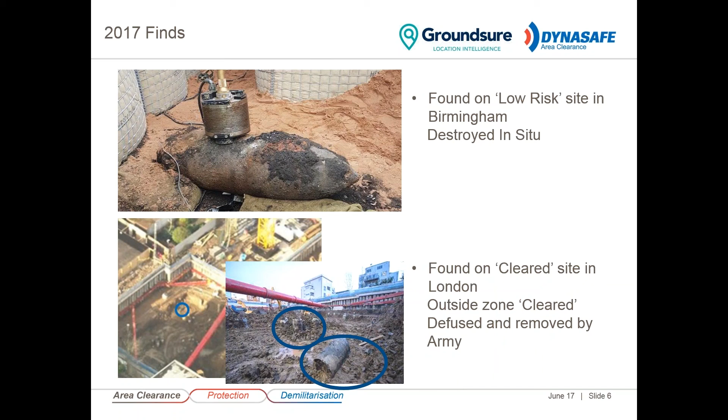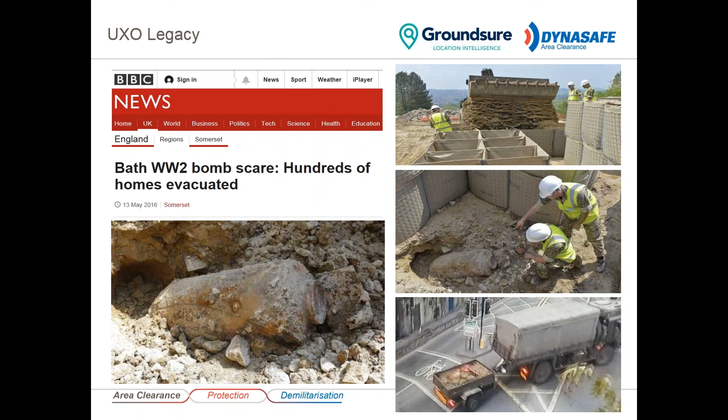So lots of items are still being found on an annual basis. We've all got responsibilities under various health and safety legislation, under various regulations and acts, and as construction professionals we also have specific duties under the CDM regs, last updated in 2015. None of these bodies of work will actually say thou shalt or you must look for a UXO. Within there, though, are very good frameworks about how to identify a risk, what risks may affect your project, and how to go about managing and mitigating them.

We're talking today about when we're out on site, not so much for the designers. At this stage, it's the principal contractor's responsibility for delivering the project safely. The principal contractor will have been issued a detailed risk assessment that the design team has undertaken, containing recommendations of how the risk should be mitigated. So the principal contractor will create a construction stage plan, ensuring everybody on site is inducted, aware of the risk, that emergency plans and procedures are in place so that if an item is found, everybody knows what to do, there's no need to panic, everybody can safely move away from the immediate work area, and everything can be escalated to the forces to come and deal with the item.

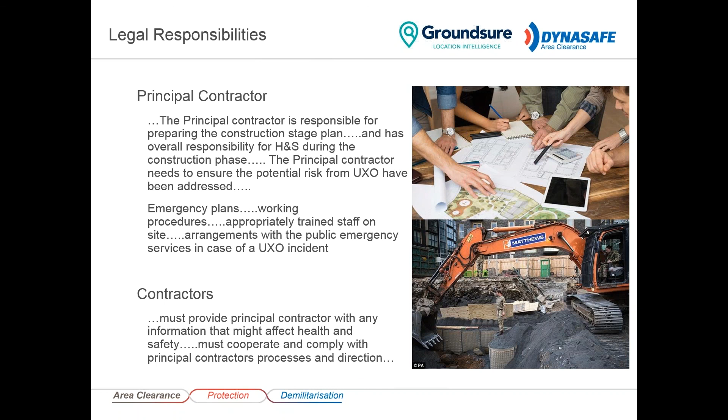I've mentioned in the legislation that there's very little - there's no specific reference to UXO. And as an industry as a whole, we've got very little relating to UXO. The approach of managing UXO is entirely voluntary.

The CIRIA guidance C681 is probably the best document that's out there. There are a number of other guides, but whereas the CIRIA guidance is over 100 pages long and covers every step of the process, some of the other guidance is just a handful of pages long and introduces only a few techniques and things to consider. The CIRIA guidance was first commissioned in 2007 and published in 2009, so about 10 years old, but it's still the best information out there. The techniques and technologies have improved slightly, but haven't had a radical overhaul, so it's still the best guidance to go to.

It's not intended to make a non-UXO specialist into a specialist, but it should allow you to understand the risks on your project, understand different approaches and techniques so you can select the right approach for your project. It was originally published because there were some less than scrupulous companies out there trying to steer people with limited knowledge down to maybe inappropriate techniques. And I'd mention that's probably just as relevant now.

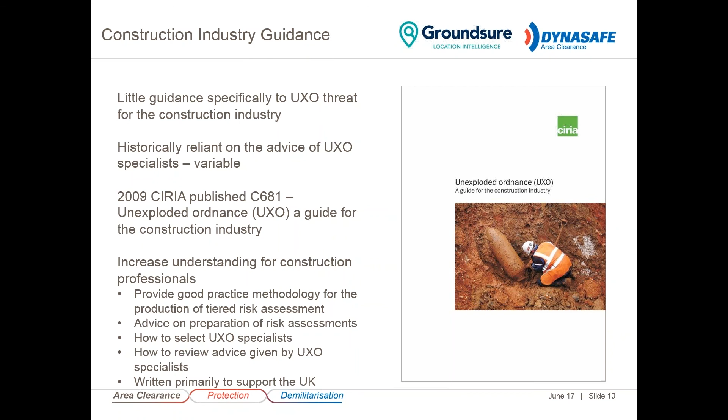As an industry, we've never been busier with the number of items being found. High-rise buildings are increasing, therefore piled foundations and general basements are going deeper than ever before. And as such, we're going into areas of ground that were never previously cleared after the war or during construction up until recently.

Preliminary and detailed risk assessments have been undertaken. They've highlighted an elevated level of risk on the project, and as such, going to the site investigation stage, or going to actual construction sites to commence work, various risks need to be considered.

Now, this slide is guilty of stating the obvious, and that is that large items tend to be deeper than small items. But it's worth noting it's not as straightforward as that. You can find large items at quite shallow depths. The bomb in Birmingham recently was found about 1 to 1.5 metres deep. The recent find in Bath was a similar level, and these were large items you would have expected to go deeper.

Obviously, the type of soil on your site will also affect how deep items can go. Dense gravels and rocks tend not to be penetrated as deeply, whereas soft cohesive soils like alluvium allow greater penetration depth.

It's also worth considering it's not just items dropped by the Luftwaffe during the war. There's our own defensive items too, things like anti-aircraft projectiles, rifle rounds, mortars, things we may have fired as a defensive measure, or placed as an area denial measure, such as a minefield or improvised mines to prevent people taking over properties we wish to protect.

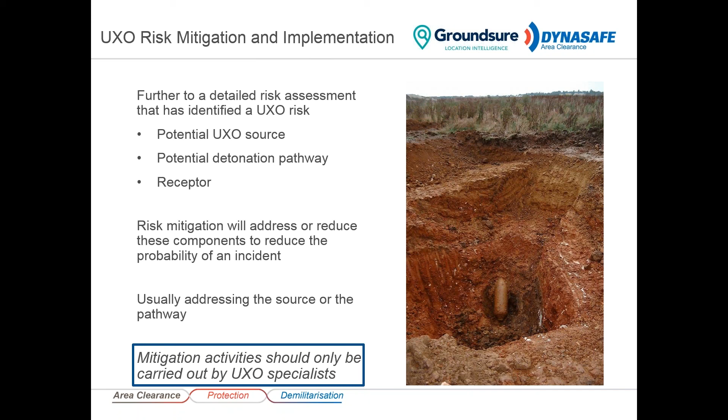It may be that a contractor has employed somebody with some kind of ground probing radar or other technique, not really designed for locating ordnance. These things happen, and to date we've been lucky that unqualified people moving or looking for ordnance hasn't caused any injuries that we're aware of. But if you are doing this kind of work, always ensure it is a recognised UXO specialist.

As I mentioned earlier, the main contractor should have emergency response planning on site, and that applies during site investigation works too, where the main contractor might not be your more traditional contractor. It might be the site investigation arm of a consultancy, a specialist site investigation consultant, or another party. Make sure the risk of UXO is clearly explained to everybody working on site, including visitors as well as people undertaking work.

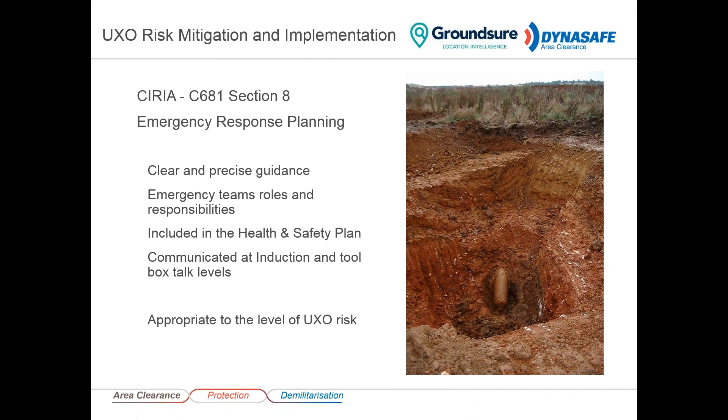Ensure there's some kind of induction process, and if at all possible, undertake a toolbox talk specific to this type of risk. If a piece of ordnance is located, make sure the supervisor knows how to safely evacuate the area, where to evacuate people to, and how to escalate the process. That may be phoning back into the office, or phoning the police immediately, dependent upon the level of risk and what's been determined in advance.

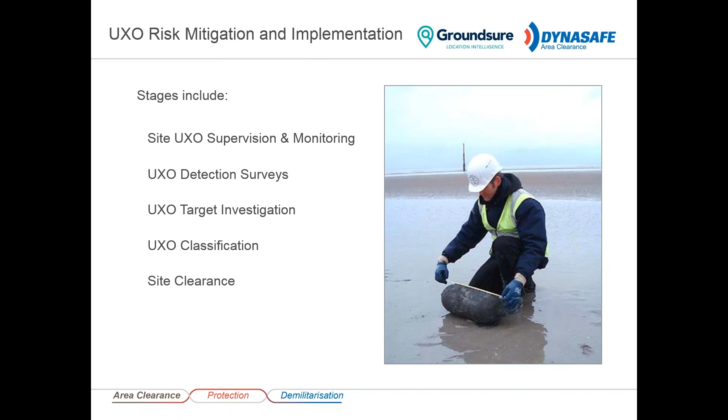Once we're on site, there are a number of techniques we can employ to manage the risk and mitigate things accordingly, and I'm going to go through those now, step by step.

The CIRIA guidance and the health and safety guidance is very much about taking a proactive approach to clearing items or potential items from site, but they also refer to ALARP, as low as reasonably practicable. On many projects, especially at the site investigation stage, mobilizing a piece of equipment to site, mobilizing a number of personnel, and spending several thousand, if not tens of thousands of pounds, may not be appropriate at that level of work being carried out.

As such, there are methodologies we can employ that are significantly cheaper, but likewise, once you're onto the main construction works and talking of spending hundreds of thousands if not millions of pounds, then employing these tens of thousands of pounds worth of mitigation measures may be absolutely what is deemed to meet ALARP.

I'm going to talk about site UXO supervision and monitoring now. This is what's more commonly known as a watching brief, or EOD engineer watching brief, where a qualified UXO specialist comes to site and helps people with the work. There will be a toolbox talk before work is undertaken, and then they will work closely with people undertaking trial pitting, shallow excavations, clearing in advance with a handheld magnetometer if possible, and identifying any ferrous magnetic anomaly within the ground.

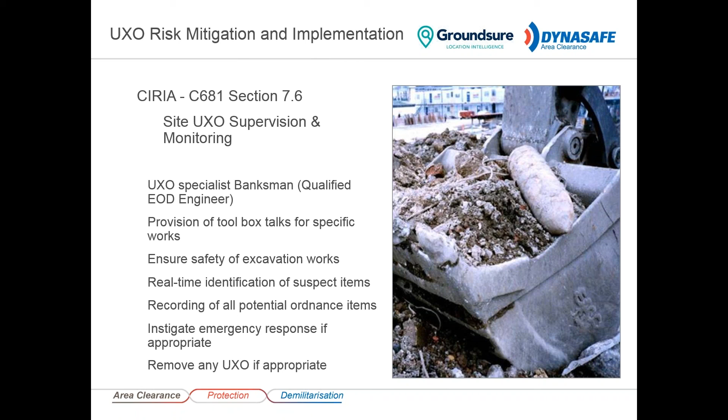Anything we find that could potentially be ordnance, we will record. It's absolutely critical that you have an audit trail of all potential or actual items so you can share that with the project health and safety team, and if the forces need to come to site, you can show them exactly what you found, where you found it, and the fact that you haven't touched it, removed it, or taken it from its original location. Also, if an item is found, the EOD specialist at this point will be able to instigate the emergency response, or advise the main contractor on the correct methodology and who to approach.

You'll notice on a number of these slides that I've referenced the clauses within CIRIA C681. After the session you can reference that document and make sure the conversations you're having with the UXO specialist meet your criteria, so you can independently validate the information they're giving you.

Here we have the UXO Detection Survey, initially a non-intrusive survey. As a company, we use the AGS system, Advanced Geophysical Software. We mobilize people to site, and they can either carry a frame with twin CV sensors on it - cesium vapor sensors, effectively a very sophisticated metal detector. These sensors can typically detect a metre wide band as you're walking across the ground.

If you've got quite a large site, we'll have to do a series of passes to provide clearance to the whole site. There's a typical survey depth - if you imagine the size of a grenade, about the size of your fist, or a mortar, probably comparable to a deodorant bottle, these have quite a small magnetic signature, and finding these items deeper than a metre is, in our opinion, very difficult and highly improbable. Things like a 50-kilo bomb, similar in size to a gas bottle you might have at home for a gas barbecue, we can detect up to about 4 meters.

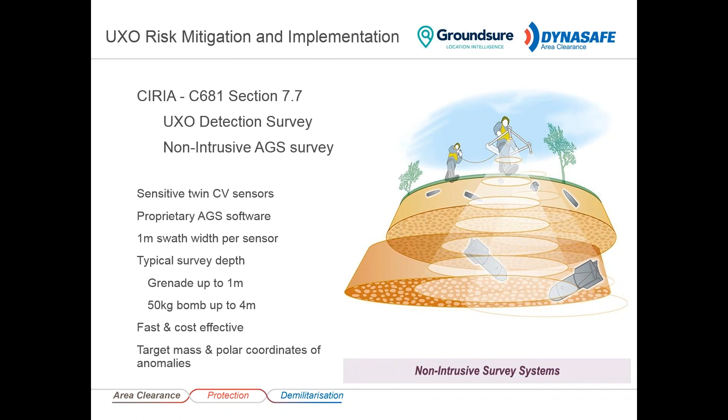The non-intrusive survey is very fast and cost-effective. With a people-mounted system, we can typically do a couple of hectares in a day. If we're towing it behind quad bikes, Argo cats, or some kind of 4x4, we can cover things like 10 hectares in a day. You should get an output from the survey giving you polar coordinates of all the anomalies you locate, and the system should also give you an indicative mass of the targets found.

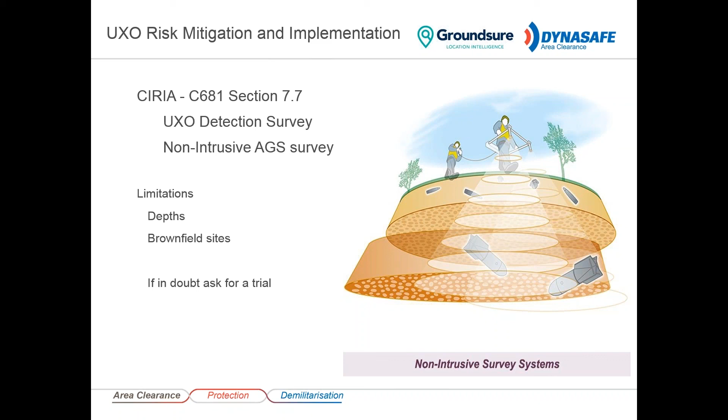As I've mentioned with the limitations, if you're not entirely certain the non-intrusive survey would be appropriate for your site, because it's quite a heavily developed brownfield site or there's a natural level of magnetic interference within the soil, ask the UXO specialist to come to site or do a trial. As a company, we routinely do trials on sites to determine whether the site is suitable - in some instances a free trial, in others a paid trial - but we'd share the output with you and discuss it to ensure the survey will perform as you intend. This is the kind of output you should be getting from a non-intrusive survey across the site.

The false colour map here: anywhere you've got a green colour, there's no magnetic interference being picked up. And then as you start to get to the blues, the pinks, the fuchsia colours, the reds, that's where we're starting to pick up something magnetic in the ground.

Now what you can see running across the top of the site is a steel fence, so there's a long linear structure there being picked up, and then also we're seeing another long linear feature marked up on this drawing as of unknown origin. At the time we didn't know what that was, but it was actually a steel reinforced footing for a wall that had been on site a number of years previously.

Then you start to see discrete blobs at the 3 o'clock position in one of the squares there. You can see several small red and purple blobs. These are actually discrete ferromagnetic anomalies, much more typical of potential ordnance or ordnance related items that you might have on site.

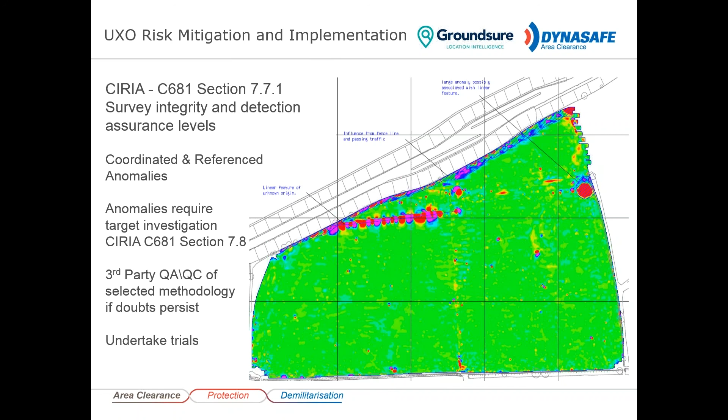From this, and in conjunction with the CIRIA guidance, we would produce a dig list. The CIRIA guidance gives recommendations on the percentage of anomalies that you might find that you need to investigate further. We're not going to recommend that you clear 100% of these items, as it's highly likely that most of them will be scrap metal - pieces of rebar, horseshoes, anything left on the site from historic uses.

People will tell you non-intrusive surveys are suitable for brownfield sites, and in our opinion, and in the opinion of the CIRIA guidance, that's not appropriate.

This was a site that we undertook a non-intrusive survey for. The contractor had told us the site was clear of any sort of metal, and he'd put a temporary access road and a piling mat in. The piling mat included pieces of crushed reinforced concrete, red brick and other metal scrap.

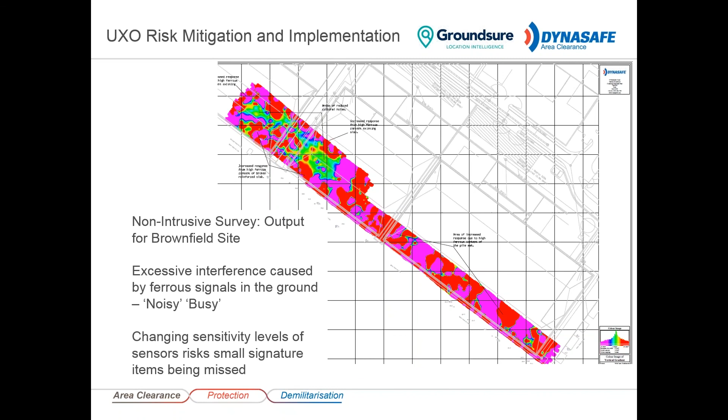People will tell you that they can play with the sensitivity of the survey. However, I personally, and as a company, we do not recommend that you change sensitivities, because if you start reducing the sensitivity, there's a chance that the small items you're looking for would be missed anyway. It's very easy for a piece of steel in the ground to mask a small item adjacent to it. So again, that's certainly not an approach we would recommend.

If you're doing piles or any kind of deep underground structure, or you want to clear a deep, long, linear structure, you can undertake intrusive surveys. With an intrusive survey, you're actually installing a magnetometer into the ground, and this can be done with a range of techniques and from a range of platforms.

The probe, as you're installing it into the ground, should have a look-ahead facility, because the last thing you want to do is push something into the ground that could potentially hit a piece of ordnance. Once you've got down to your bomb penetration depth, you can remove the probe and start to take the survey so that you can clear a column of area around the survey centre.

Again, this can be fast and cost effective. The data can be logged during the process, so you can get a very good understanding and interpret your results so that you know whether you've got a piece of ordnance in the ground.

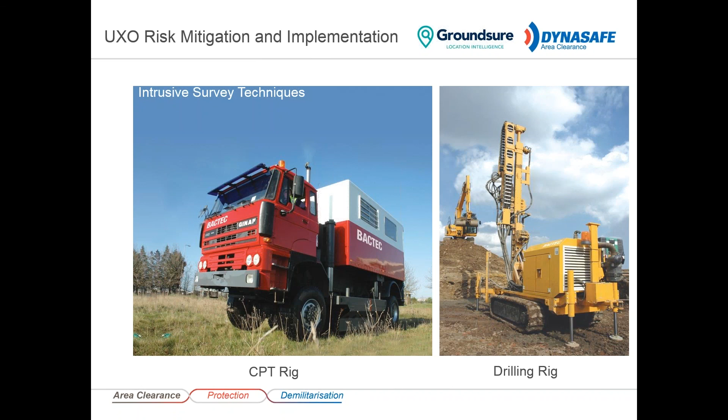We use modified CPT rigs on cohesive and soft soils, and we can use drilling rigs to get through made ground, to get through very dense granular materials. On some projects we'll use them both together, where the drilling rig goes down through the made ground to the soft cohesive soils, and then the CPT rig follows along. A range of techniques, and most ground situations can be dealt with by those two approaches.

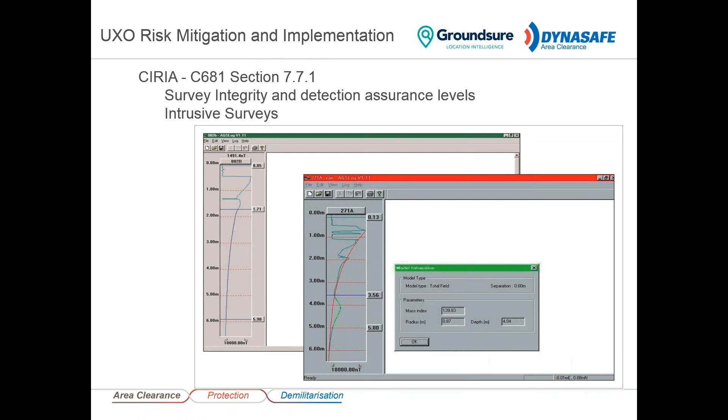Again, software-based output - these are the kind of graphs we see in real time from our sensors, and we would evaluate these before giving you clearance or otherwise on a survey location. This is a typical pile layout.

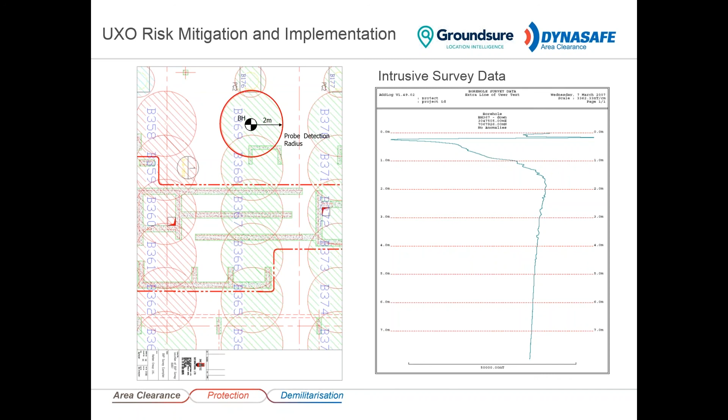The large squiggle at the top is due to the big metallic object we're installing the probe with, either a drilling rig or a CPT truck, but because we've got a look-ahead facility on the probe, we can discount that squiggle as the survey's already been undertaken beyond that depth.

This is the survey graph you may get with an anomaly in the ground. As you can see in the green highlighted area, you're effectively seeing a north pole and a south pole from a ferromagnetic item.

Where that curve crosses the curve where there's no item present, that would indicate an approximate depth of an item, and the magnitude of the wave that's formed, in consultation with its depth, allows you to model the mass of the item in the ground.

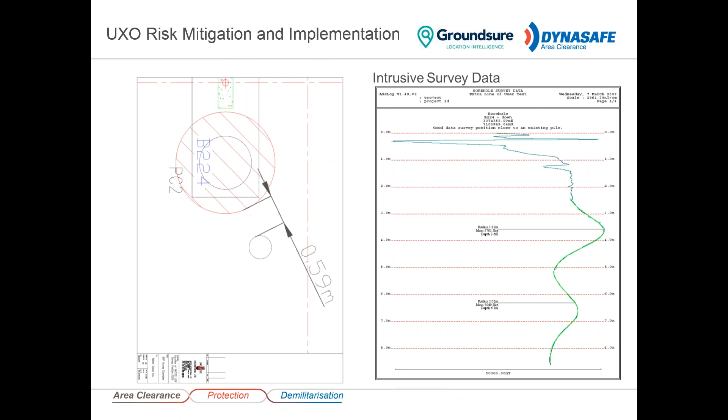So if we found a 50 kg bomb, it may have a graph very similar to the one on the screen there, but if we found something like a 10-meter long RSJ - very long, very thin, an unusual shape compared to a piece of ordnance - the peak of those curves would be so different that we'd quickly be able to say yes, there's a magnetic item in the ground, but it's absolutely not ordnance related.

Likewise, if you do an intrusive survey on a site adjacent to existing steel reinforced piles, you're going to get an impacted survey result. Again, you'll see from the picture on the graph there it's so dissimilar to a potential ordnance item that we can quickly discount that.

However, picking up on existing steel items in the ground does give you potential to be masking other items, potential items of ordnance. So again, we've got additional techniques, including taking multiple surveys and comparing the data from them to try and assess and analyze whether there is something else in the ground.

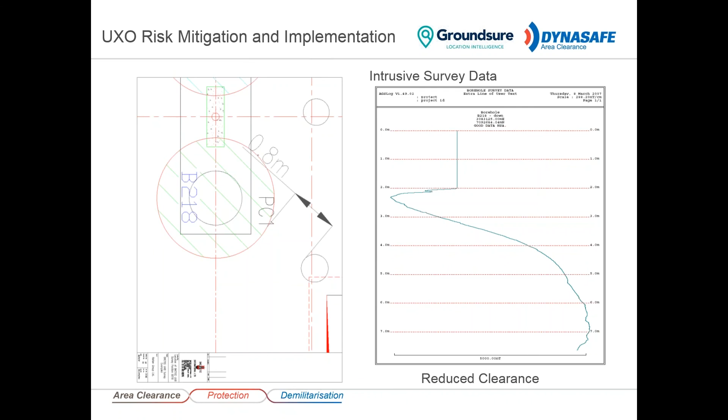As I mentioned, do not play with sensitivities of non-intrusive surveys, but if you don't need to clear a pile location to 2 meters with an intrusive survey, we can reduce the radius we provide clearance to, so we're not picking up interference from existing piles. For an intrusive survey, that is a valid technique.

If you were piling 100 piles for a £100 million high-rise tower in the centre of a city, you would expect to clear every single one of those pile locations with an intrusive survey. When you're maybe doing £10,000 worth of site investigation, it doesn't make commercial sense to mobilise that kind of equipment.

What we can do to support things like boreholes for sampling, window sampling, well installation, is provide an EOD engineer to carry out a downhole survey. The downhole survey is very much a binary survey - it tells you if there's something metallic in the ground or not, but it doesn't give you any of the graphs from the previous intrusive surveys, or any estimation of what mass is there. Perfectly acceptable for a borehole.

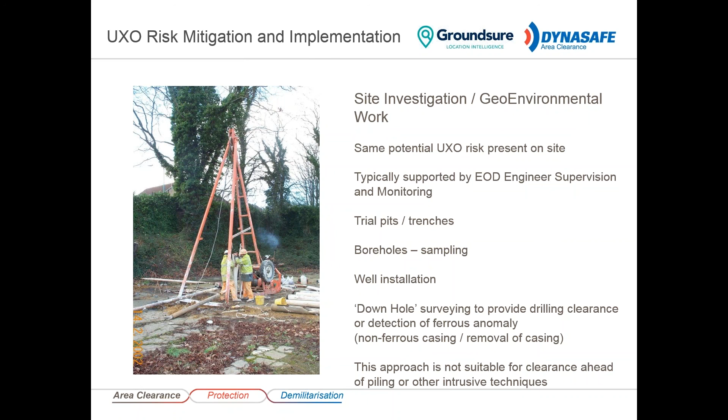But I must stress that this kind of approach shouldn't really be taken for clearing pile locations or things like that. There are people out there who will give you a downhole clearance approach for pile locations - if they offer that, I would suggest you steer away from it and ask them for a proper intrusive survey. There's a range of UXO specialists, including ourselves, that can provide this kind of approach.

If we get an anomaly, we locate something metallic. Even with the best equipment out there, the best software for assessing the data, you can't tell what the item is until you've exposed it and visually identified it. A 50 kg bomb and a buried gas canister can give you very similar targets.

Again, within the CIRIA Guide, section 7.8 explains what a UXO specialist should be doing for target investigation. This should always be undertaken by a 2-person team. Safety is absolutely paramount at this stage. Once they identify or come across the item, they will tell you whether it's safe to continue removing material to get a better look at it, or whether we stop work immediately.

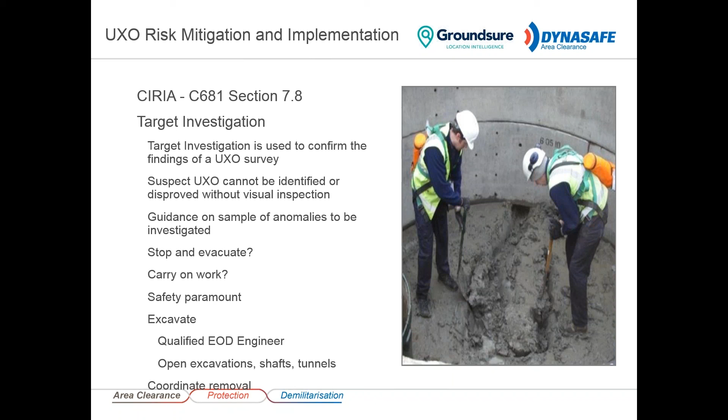Again, we can do small excavations such as a trial pit around an item. In the past we've also dug quite significant shafts, as you can see in the picture there, and we've also tunnelled either horizontally or at an angle under buildings or other structures.

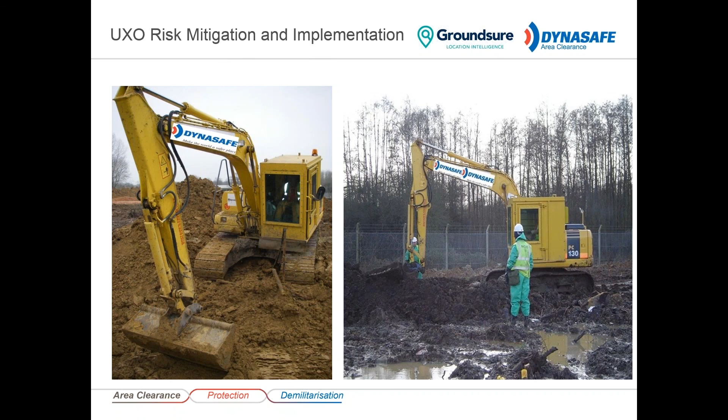If you've got a particularly high risk site, or the risk is of a large number of items, Dynasafe BACTEC operate a number of armoured excavators. We currently have 2 in the Falklands working on minefield clearance, and we've got 1 on a large project up in Scotland. The cab is designed to withstand a blast directly under the tracks, so the operator would get out of there safely. Likewise, the banksmen in the picture on the right are only making sure the excavator gets into the right area, and would of course be removed ahead of the excavation commencing.

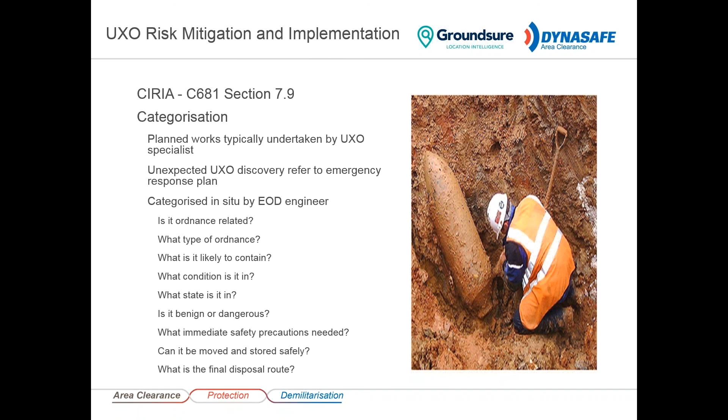So once you've found your ordnance or anomaly, at this point is it ordnance or is it a benign piece of metal? If it is ordnance, what type is it? What's it likely to contain? Is it traditional explosives? May it have a chemical, biological or radiological element to it? And probably equally important, what condition is it in? Is the casing damaged? Is it leaking? Is anything getting into it? Is anything getting out of it? All these factors determine whether it's safe to leave the item where it is or whether it needs some rapid mobilization of the Army bomb squad to site.

Ultimately as well, what is the final disposal route? The final disposal route will always rest with the bomb squad, but they may turn around and say that if you've got a commercial UXO specialist on site who's licensed to destroy items, that they can destroy the items. Or they may come to site themselves, destroy the items, or more likely remove the item from site.

If the item is of an ordnance nature but is now perfectly safe, either it's been detonated or it's a training piece with no explosive content left, you should be issued with a free from explosive certificate, and then your item can be disposed of through a licensed scrap metal route. If it's normal scrap metal, again, you can just remove it from site and get rid of it via scrap.

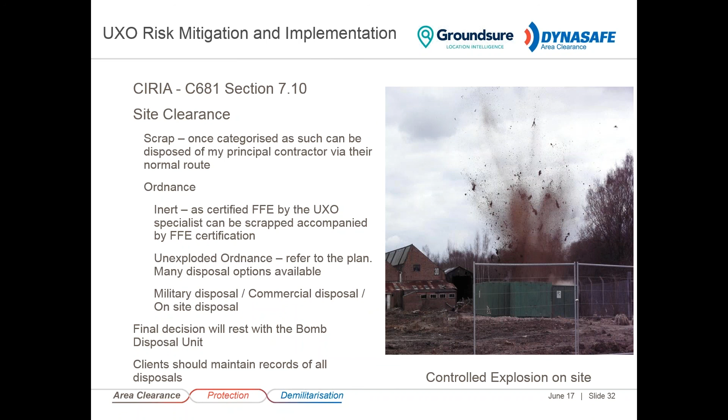Absolutely critical again that the clients maintain records of all items disposed of, whether that's disposed of on site or removed from site.

Another unique option for ourselves, Dynasafe BACTEC, is what is known as the bomb truck. The bomb truck has the type of chamber that you see at airports that suspicious packages can be put into. We have taken the initiative and installed one in the back of a road legal truck. This has been approved by the HSE, the police forces in the UK and the Highways Agency. This truck can come to site, and if ordnance has been designated as safe for removal and doesn't exceed 8 kilos of TNT or equivalent explosive content, it can be put in the back of that blast-proof chamber and then we will take it away.

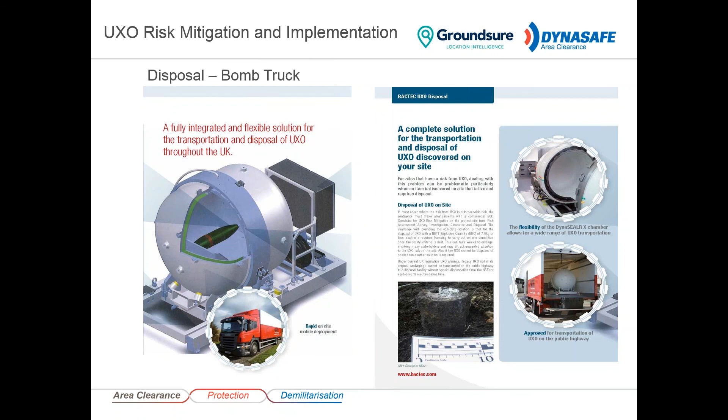We don't want to detonate the ordnance within the chamber, but we could if required. We would rather transport it safely on the road to a licensed disposal facility. If any of you get a moment and Google Dynasafe BACTEC on YouTube, you will see some of these chambers with actual items being demonstrated. I hate to say it, but it's actually quite a dull video because the chamber doesn't shake or rock or anything. You would almost not know the blast had gone off. They contain the blast so well.

The final thing you would want to consider on your project is verification reporting. You need a report to say that the UXO has been mitigated, the works that you've undertaken. As a company, we support you with the verification reporting.

We would give you X and Y coordinates of all the intrusive surveys that we've undertaken, the radius of clearance, and the depth of clearance that we've gone down to. Likewise, if we've done a non-intrusive survey, you would be issued with all the data from the false colour maps, from all the raw data behind that, so you know exactly what anomalies were located on your site and what follow-up activities were done. This allows the commercial company to give you a very strong verification report and strong information as to what tasks and clearance activities have been undertaken.

Merely getting a 2-page report saying we've come to site, we've surveyed it, we haven't found anomalies is not really an acceptable clearance report in our opinion.

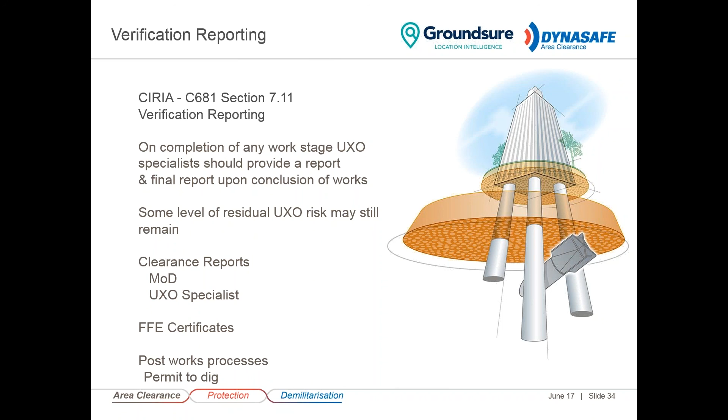Even after all the clearance activities have been done and the verification reporting, we'd always recommend best practice such as permits to dig, controlling access to areas, because we may have cleared certain areas and we absolutely would stand by our clearance to the millimetre of the areas that we've cleared. But should scopes of works change, should additional work have to be undertaken and you start to operate outside of the areas that were cleared, effectively you need to start the process again from scratch.

And then section 9 of CIRIA C681 tells you how to appoint a UXO specialist. The key thing here is absolutely understand what the requirement is for your project, what has been identified as a potential risk and to what level of severity.

Make sure the company that you're talking to can meet these requirements and that they have the absolutely appropriate techniques for dealing with these. Ask them to see outputs of data they've provided in the past, reports or clearance certificates from previous projects. Do a little bit of due diligence, check their qualifications, check their experience. Have they got a track record in delivering projects such as you're involved with?

And if necessary, ask them to undertake a trial. Likewise, you can have third parties check them and advise as to whether or not they are suitable to take the works on that you're asking them to.

Do they employ in-house EOD staff or do they use freelance people? The best contractors out there directly employ their own staff. They know who the best people out there are, what these people have been trained in, what they are fit to deal with. Whereas people that bring in freelance people, the quality may or may not be there.